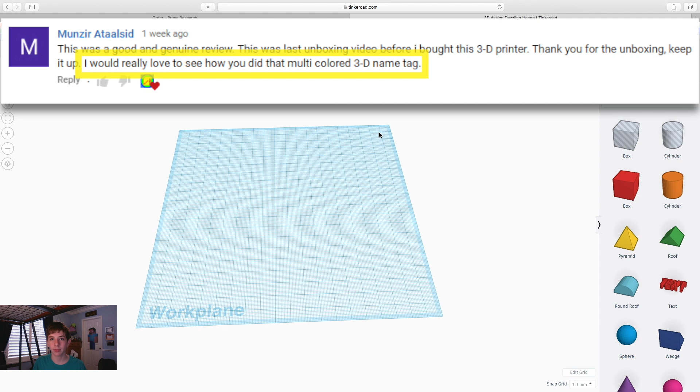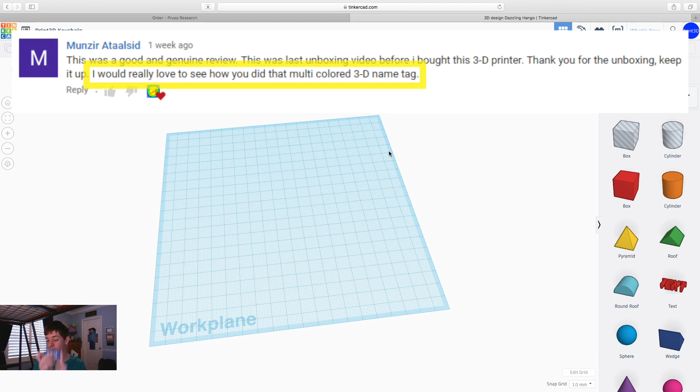But today, by popular demand, I have been requested by Munzir Ataalsid, I hope that's how you say your name, he said he would like to know how I made the colored keychain like this one. This one just has random letters on it. But today, I'm going to teach you how to do that.

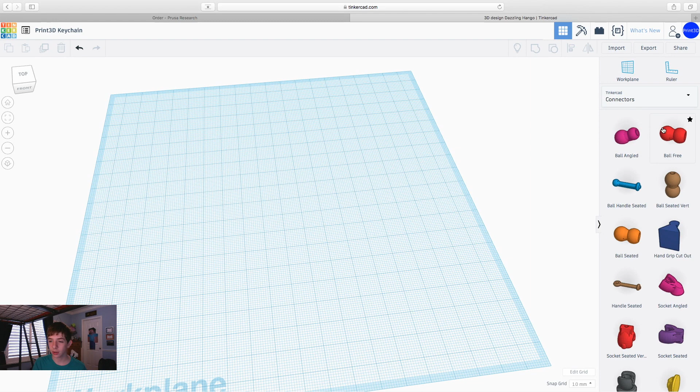So we are here in Tinkercad, it's a free cloud-based CAD program, that's the word I was looking for, where you can take these blocks on the side, other shapes, text, connectors. I really only use it for the basic shapes and text, but you can use it for a lot more, I'm pretty sure. You can use it for circuit assemblies, you can use it for lots of stuff. Today, I'm just going to teach you how to make a keychain.

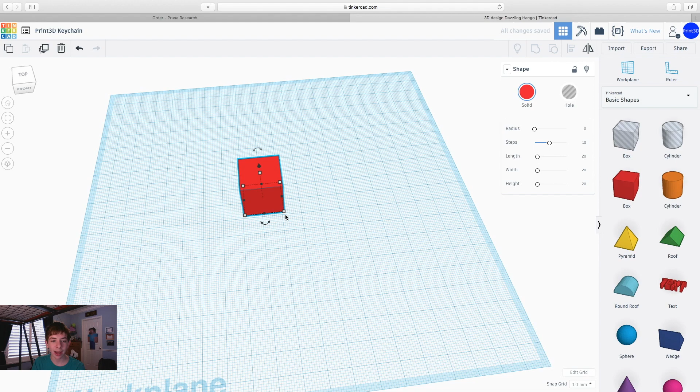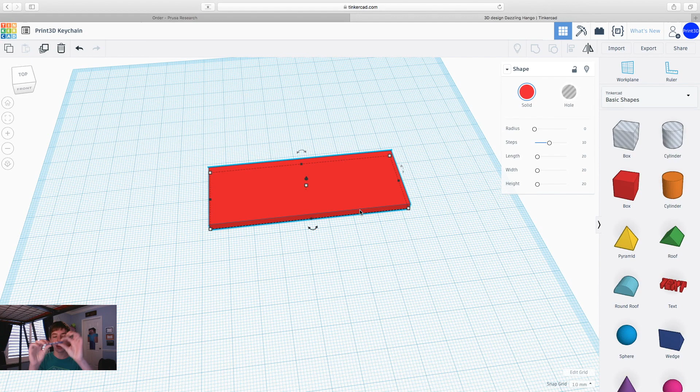So let's drag out a block. I found that making it 80 millimeters by 30 millimeters works very well, with a height of 3 millimeters. So that is what this is right here: 80, 30, and 3 millimeters. Now I'm just going to color it blue, because, no, I like the other blue better, just so I can see what it will kind of look like as it's printed out.

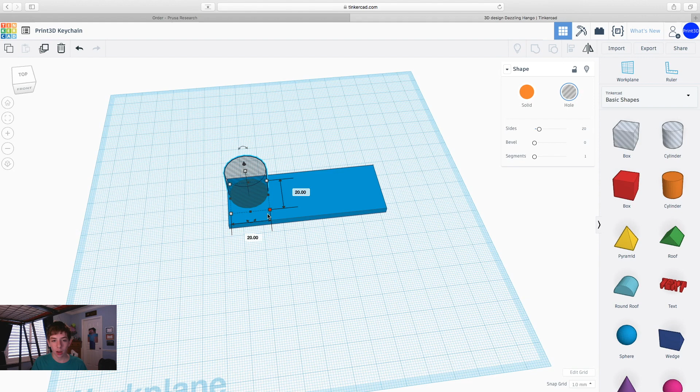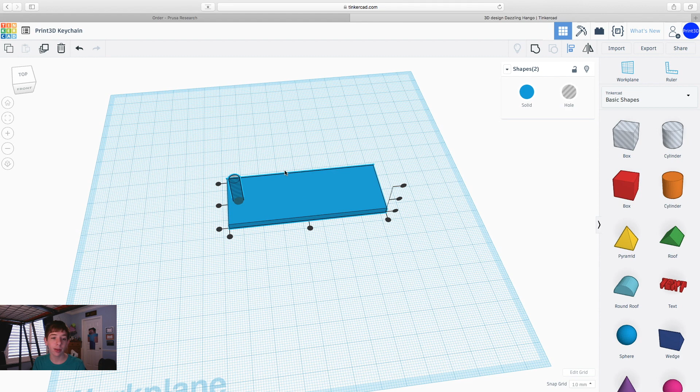Now I'm going to take this cylinder, which is a hole, and adjust that to be a total of 5 millimeters by another 5 millimeters. It doesn't matter the height on this because it's a hole, so it's going to go however far you want it to. I'm just going to select both these, click and drag, and now it says Shapes 2. I'm going to hit this button right here, which is Align, or I can just hit L, and it brings up this whole thing.

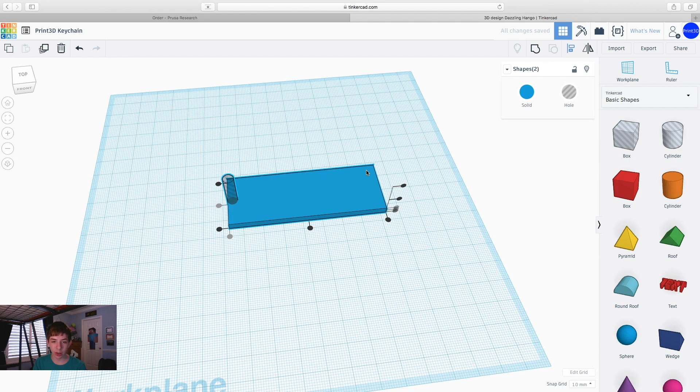By hitting any of these, it aligns my two shapes to where it tells them to go. See, now we've got this shape in the very middle. You can put it on this edge, in the center I usually have it around. I put it to this middle right there first, stop the align, then click on this single shape and use the arrow keys to move it 1 millimeter at a time. I find that that is a good distance.

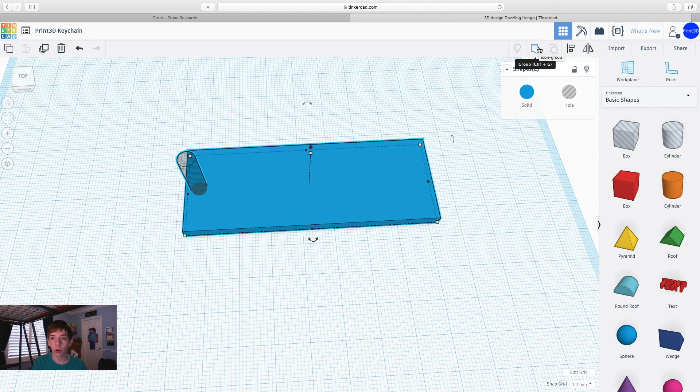So I'm going to select them both again, hit this button right here, or Control G, and that groups them together. So now that is how I made the blue part with the hole.

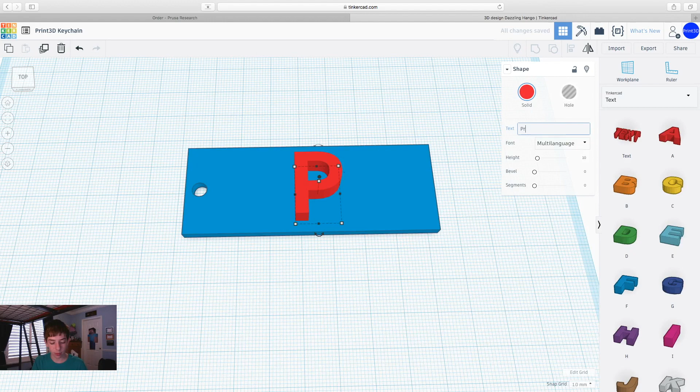Then I am going to change this dropdown to text, drag some text out onto here, and make this one say Print3D. As you can see, that's a little bit big, and I'm not going to be printing it in red, I'm going to be doing it in white, just like this one. So maybe let's try changing the font to Sans. Okay, that makes it a little bit smaller. Maybe Sans Mono, that just makes it bigger.

Or Serif. So I like Sans the best, I don't know, just a fan of Sans. Serif's also nice, but it is a bit bigger, which is one reason I'm not as fond of it. Multi-language is just large, that's nice and skinny.

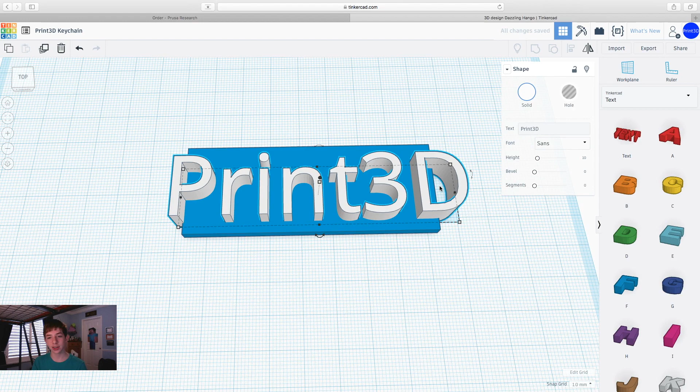So I'm going to drag that to about equal distance between the hole and the edge, and the hole and the start of the P. So now I'll just take this and drag it over. It does get compressed, but 'Print3D' is kind of a long name to do on a keychain, that's why it doesn't work super well.

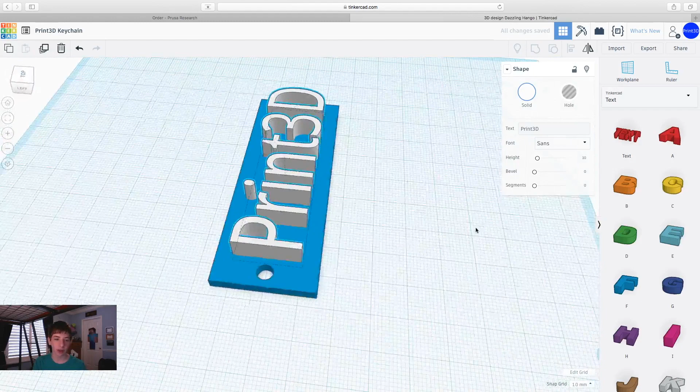And now I'm going to do the same align on this center line. The reason I don't do the align right here is because then it puts it over this hole where it would go on your keyring.

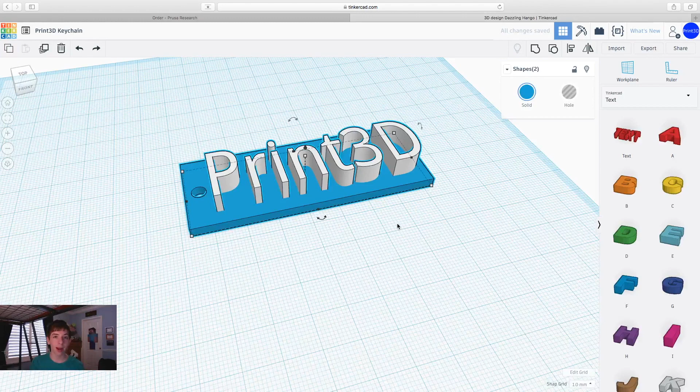So let's just hit Control Z, or if you're on a Mac, Command Z, which I am, as you can tell by it being on Safari. Up here, and ooh, what's this? Maybe something from Prusa? I don't know, you guys will have to wait and see. And for this one, what's going on? What the?

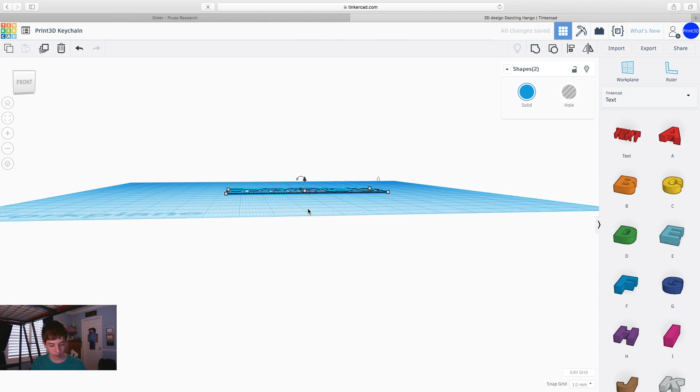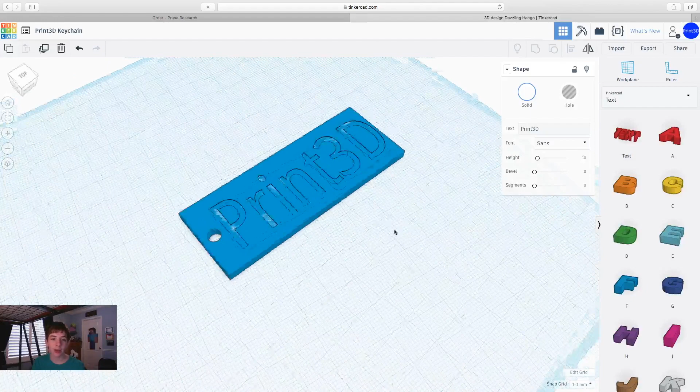I just moved that the wrong way. For the text, I want it to be another 3 millimeters from this surface, so I set it to 3. But we have this horrible double planing going on right here, which is not what we want. Since we want it to be 3 millimeters above the base of the blue, we have to set it to 6 millimeters from this bottom right here.

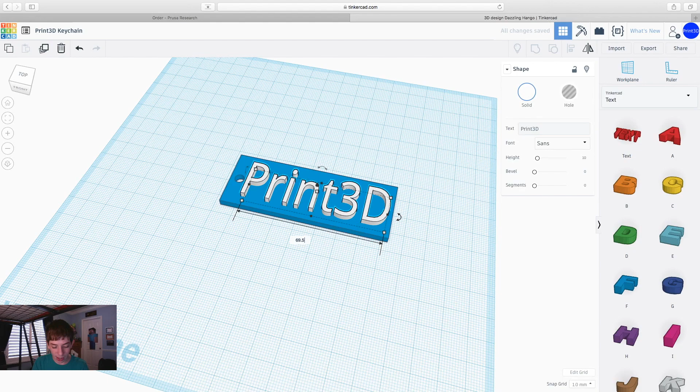So now that is our keychain. I think I'm just going to make a tiny little adjustment right here, make that 69.5, and there we go. Our keychain model is complete.

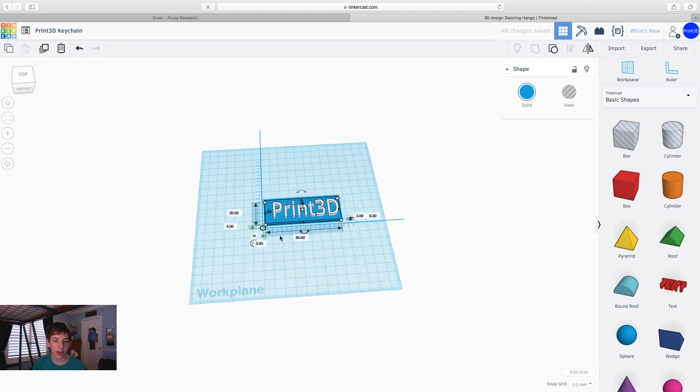That's why I like using Tinkercad for some projects, because it's very nice and easy to use. There's also this ruler thing, I'm not quite sure what that does, I think it measures. Yeah, so it measures how long this is, how high this is right here. It doesn't measure the Print3D for whatever reason, but then it measures 3 millimeters and 4 millimeters from where I put it down, 80 millimeters and 30 millimeters. So you can use this for quite a lot of stuff.

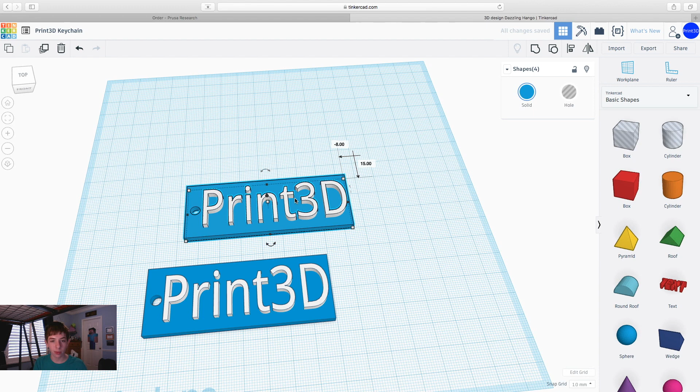I can even select both these, hit duplicate, and now I have several Print3Ds. Right now I have 4 selected, which won't work, so there we go. Now, to get this model out and actually use it for printing, we need to hit this export button.

And for this, I'm just going to hit everything in the design.

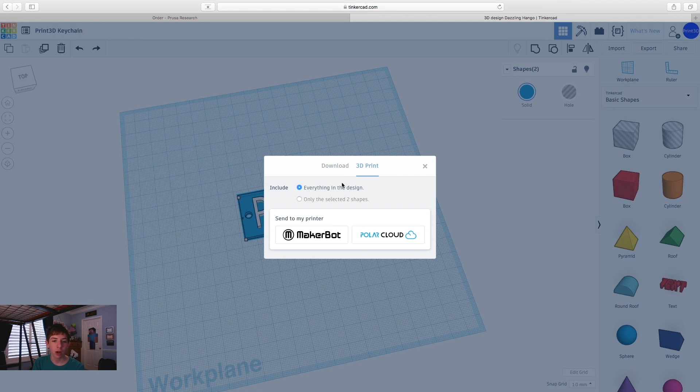Also, they have some 3D printing services available. Oh wait, no, just so you can send it to MakerBot printers or Polar Cloud printers, which I don't have. I actually don't have any printer right now, so the footage you're going to see of me printing this is old.

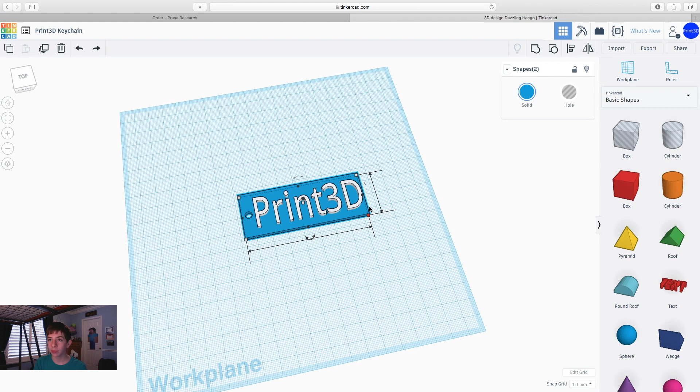For 3D print, STL, and now it just pops it up right here. And now I will open that in Cura to slice into G-code.

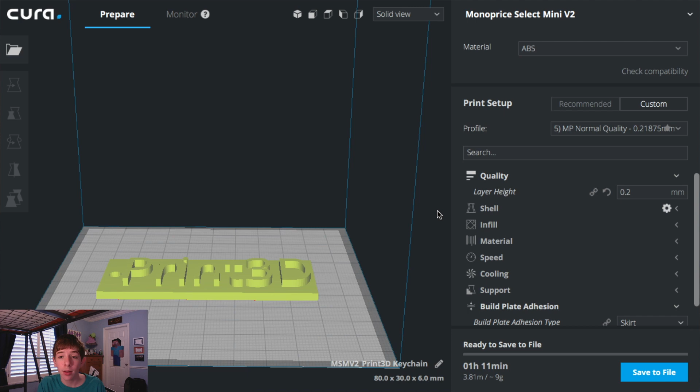And here we are in Cura. When I switched over to this Mac, it's actually Cura 3.1. I thought it would be better to just download the newest version of Cura so it was up to date. And so now we have this, we have imported our model, as you just saw me do while talking.

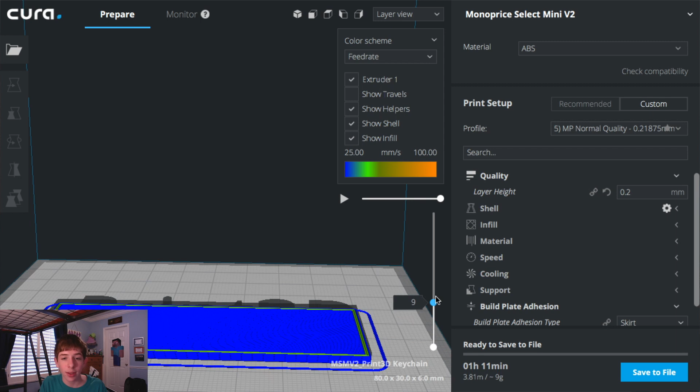So now we're going to hit Solid View, then Layer View, and it is going to show us the individual layers from 30 to 1. So we want to find where the big block ends and the text starts. That would be right here between 15 and 16. So we are going to take our G-code command and put that at layer 16.

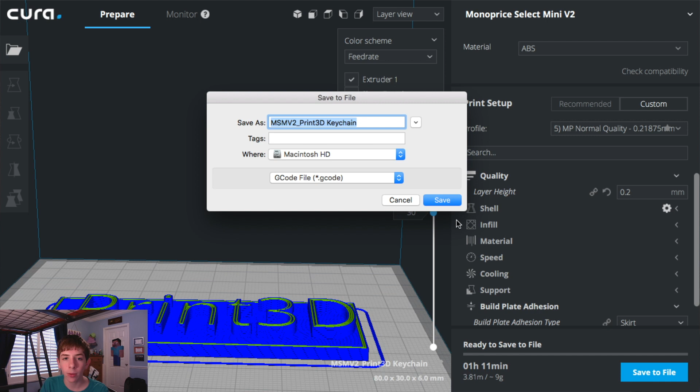So now let's just save out this G-code by hitting save to file. Let's just rename it that. Save. I think that's because I already have one saved on my desktop.

Just that's why. So now I'm going to show you how to edit the G-code. This is TextMate. I have opened up the G-code in here, TextMate. You can just download it for Mac from the internet, and it just allows you to edit text. Right now I have the G-code open in here.

So what we're going to do to be able to make it multicolored like that, we are going to hit either Command F or Control F, depending on whether you are Mac or PC. We're going to hit Layer, Find All, and now we're going to scroll down to Layer 16. So this brings us to Layer 16. We can exit out of the Find, and you're going to hit Enter.